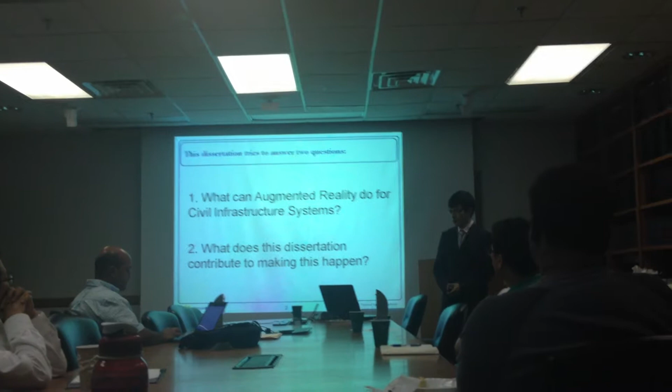Well, I don't want to be that serious. Actually, I just want to address two questions. The first one is, what can augmented reality do for civil infrastructure systems? And as John Kennedy says, ask not what augmented reality can do for you, but ask what you can do for augmented reality. So that's the second question I want to address: what can we do to explore the potential of augmented reality?

Since we have a lot of guests who might not be very familiar with augmented reality, let's start with what is augmented reality. If you search online, there's a classic definition with three items: first, the alignment of virtual and real objects; second, the coexistence of virtual and real objects; and third, virtual and real interacting in real-time frame rates.

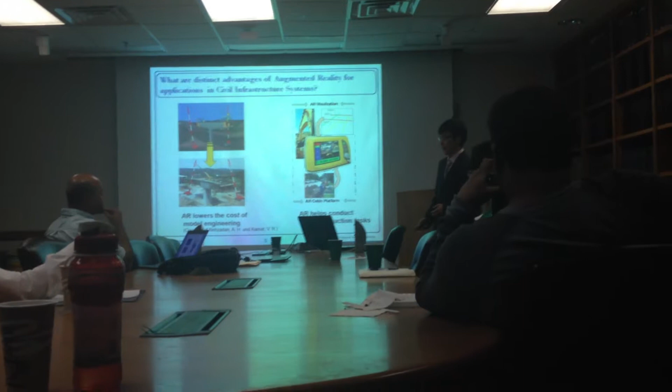Or, because of the coexistence of real and virtual, we can begin to conduct field tasks with augmented reality. To be more specific, researchers have identified eight specific areas where augmented reality could be useful, like excavation, coordination, inspection, etc. Let's take a look at a few examples.

First, excavation. It's about visualization of underground pipelines so that operators can see them to avoid collisions.

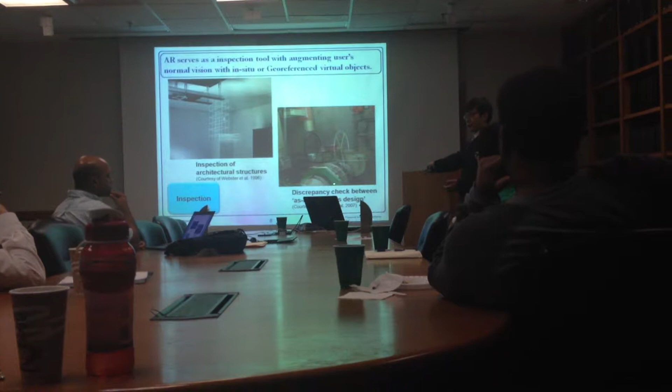Inspections: you have a design model and an as-built model. You want to compare the discrepancy between the two to find out what you need to do about it. And supervision is about superimposing the schedule on top of your job site so you can find out whether you're lagging behind or on track.

Strategizing is about a plan for the future. You want to do some simulation to see whether that works, to find out the economic and efficient way to do that. Those are some examples of augmented reality in civil infrastructure systems, and that's a brief answer to the first question we talked about. Now let's get to the juicy part: what can we do to make those things happen?

Before we get into these varieties of applications, there are always some technical issues you have to confront. The first thing is called registration, which is about alignment of the virtual and real objects. And occlusion, which means you have to create an illusion that the virtual and the real coexist together.

After we solve this problem, we can begin to get into a lot of varieties of applications. Because all these applications involve these technical challenges, that's why we came up with the idea of integrating these solutions into an open and scalable framework, so that third parties can just focus on their domain-specific questions and not worry too much about the underlying registration and occlusion problems.

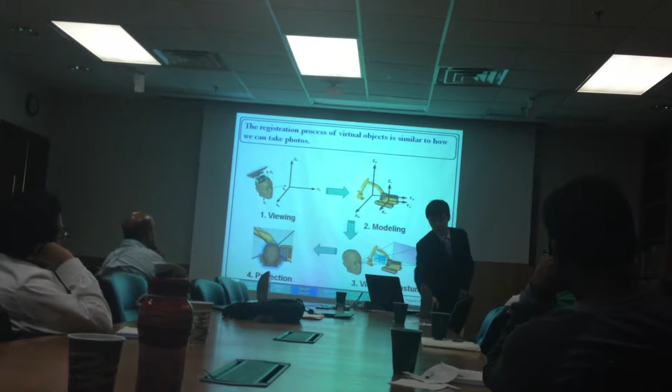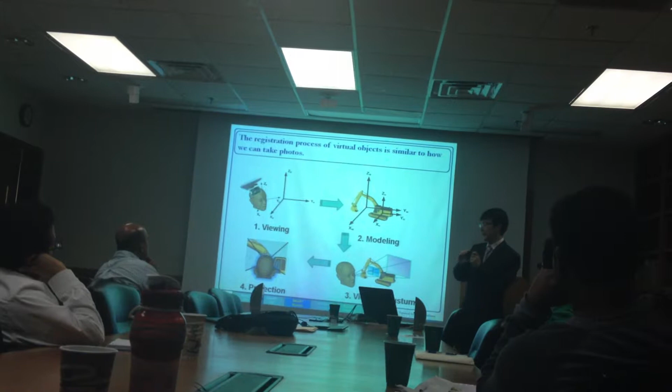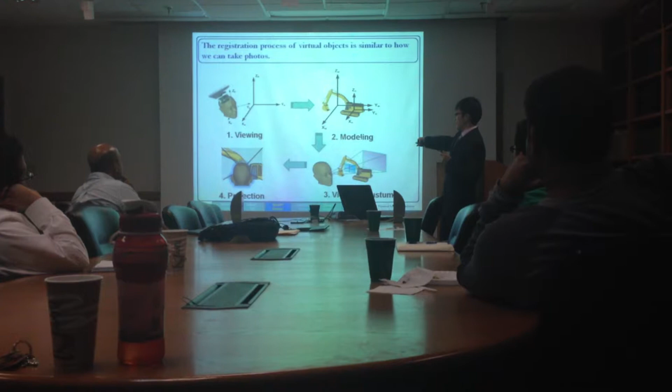When you begin to take pictures, you ask someone to be somewhere and make a pose. Then you position your camera and rotate it or whatever, then you adjust the lens of your camera, and boom, you take the picture. That's exactly the 4 steps: you position your camera, you ask the virtual or real objects to stand in a certain location, you adjust your lens, and you take the picture.

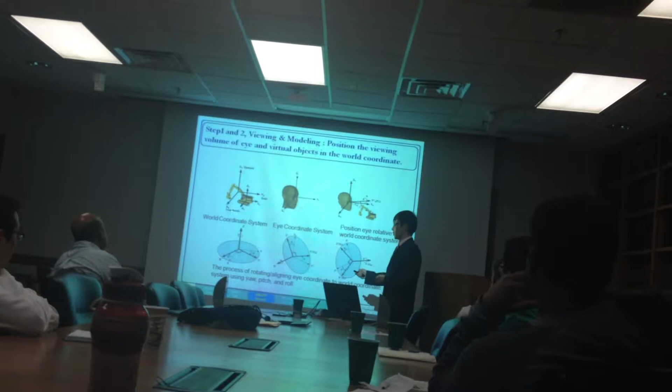It's not that simple in augmented reality because there is virtual and real. For the real part, we have the RGB camera. But for the virtual part, we need the virtual camera to be aligned with the real camera so that the virtual objects can be aligned with the real objects. That's why you need to track the location and orientation of the real camera and adjust the parameters of the virtual camera accordingly.

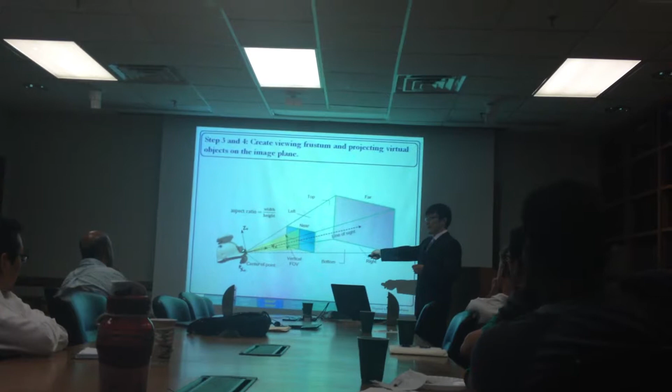The real camera has its own field of view and its own principal point. So you want to make sure you calibrate your real camera and put those parameters into your virtual camera.

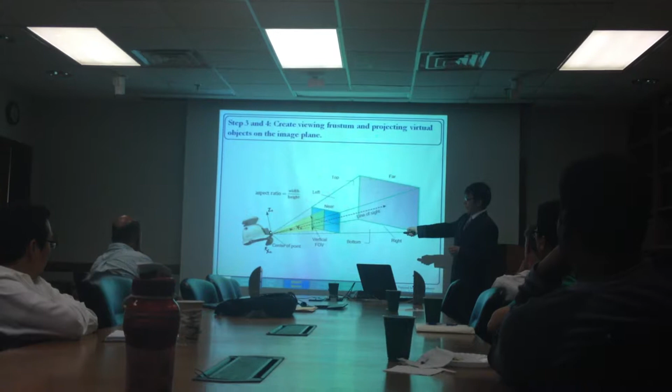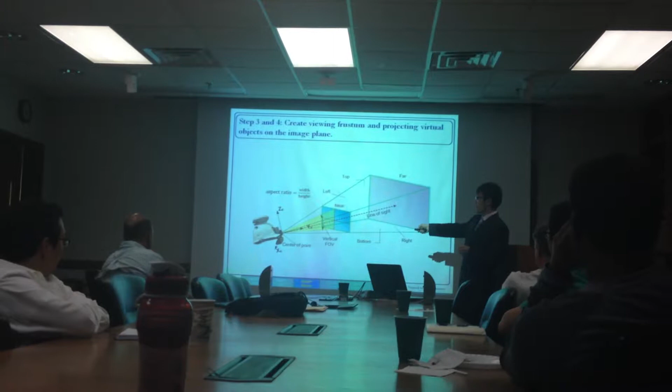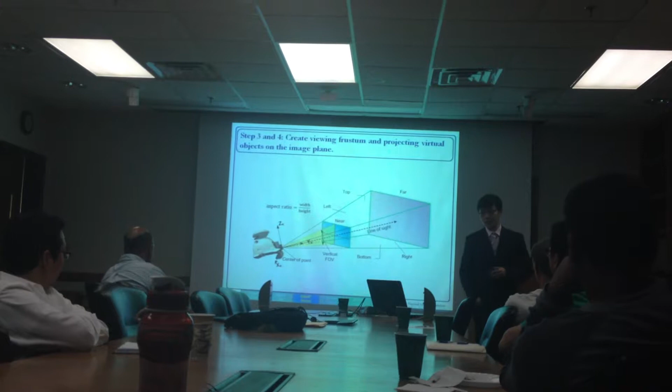So that's the job about smart motion. It's about aligning virtual with the real objects, and it uses information of location and orientation of the real camera.

I said I can get the location information from the GPS. That's actually the job of something called smart sensor. And smart sensor uses AR location and AR orientation as a common interface to smart motion. But since I said I get that from GPS, why don't I just call it AR GPS?

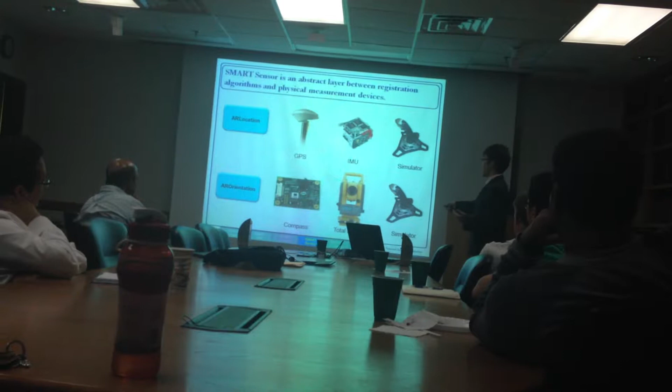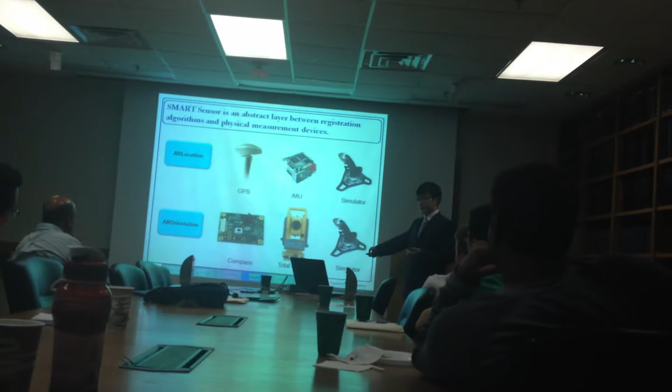Because you can not only get your location from a GPS, but you can also get that from, for example, an IMU, an inertial measurement unit. Or you can just simulate that, give them an arbitrary number. And that's the same thing for orientation. You can measure that by the compass, or you can do that with a total station, or just simulate that. That's how smart sensor acts as the abstract layer between the smart motion and the physical device.

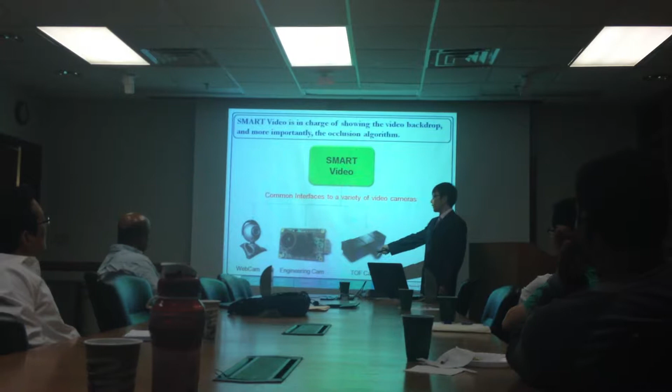Because the problem is, you can not only get your real background from a web camera, you can also get that from an engineering camera, or even something called a time-of-flight camera. This camera doesn't give you an RGB value, it actually gives you a depth map of the whole environment. Or even more, you can get a hybrid camera with an RGB camera on top and a depth camera on the bottom. So the same principle applies here.

Smart video provides a common interface to these different kinds of camera so that it looks transparent to whatever sits on top of that, just like what we talked about with smart sensor. But if it just provides a common interface, then I can simply integrate that to the smart sensor. The reason I separate that is that smart video is going to handle some other important work called occlusion.

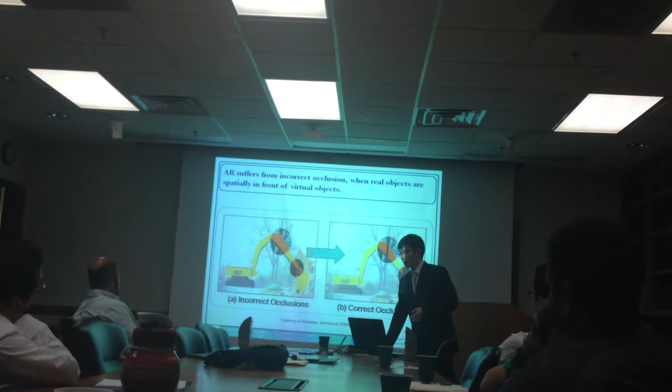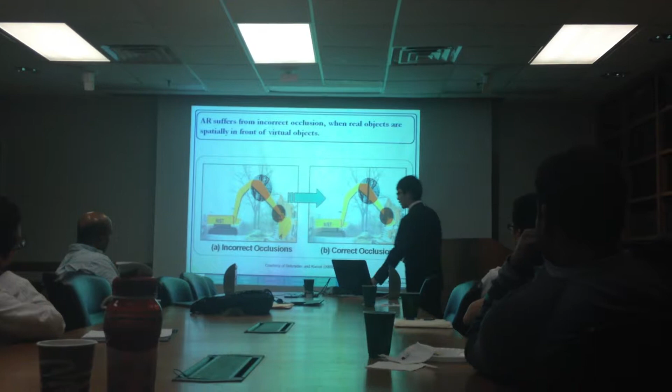We have been talking about the alignment between the virtual and the real objects. But don't forget, there's a second definition called the illusion that real and virtual objects coexist. And one of the illusions is that you need to correctly solve the spatial cue between the virtual and real.

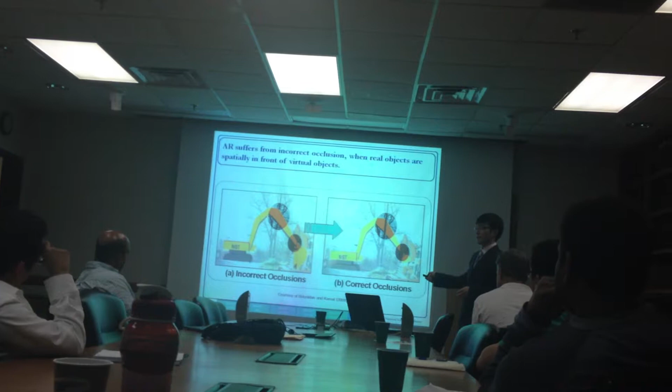For example, traditionally, if I'm using an RGB camera, when you project the real thing onto that camera, the distance information is lost. So there's no way but to put the real images as a background and always superimpose the virtual objects on top. But it's not always this case because, for example, this balloon can be behind the tree instead of in front. This shows a correct occlusion effect, while this is not. So that's why we need to solve this occlusion issue.

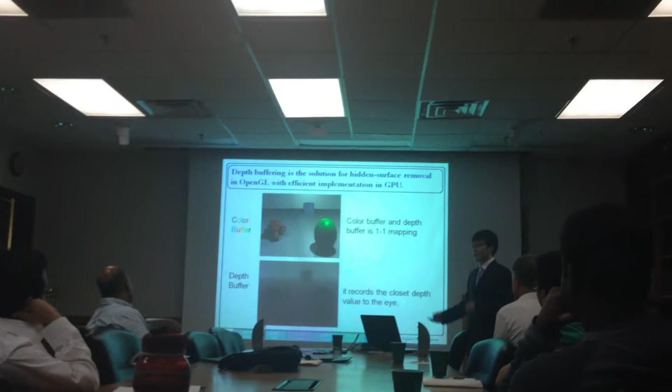How? Well, there's an old saying in China that says, if you don't know how to live your life, simply look at your neighbors. Here, we are looking at OpenGL. OpenGL is a graphics library where it helps you to create 2D or 3D images, geometries, and so on. And for OpenGL to solve the occlusion issue, it maintains two buffers, a color buffer and a depth buffer.

A color buffer is what you see on your screen, right? With RGB values, so you know the shape, the attribute of the geometry. Depth buffer is not something you can see, but it's very important. It helps you make depth comparison and decides which part you can see, which part you cannot.

Let's make a comparison. For example, I want to render a picture frame on the back of the conference room in OpenGL, meaning it's virtual, and its color, say, is blue, and it's 7 meters away from me. So when I render that frame, I put the blue pixel into the color buffer and put a 7 meters distance in the depth buffer.

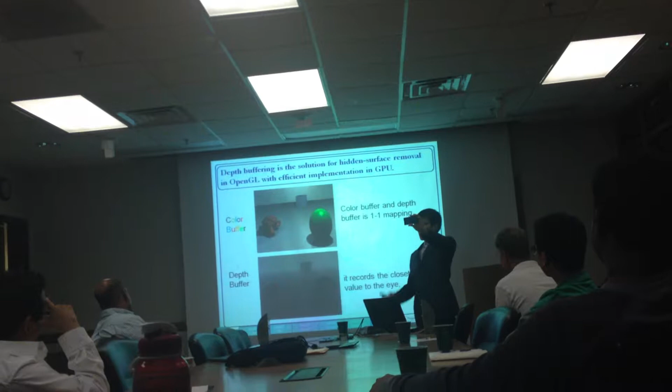Then, suppose I have a camera right in front of me that occludes that blue frame. When I render that, suppose this is 1 meter away from me, I'm going to put black, put the 1 meter in the depth buffer, compare that with the 7 meters. Since 1 meter is smaller, it's going to replace the previous value in the depth buffer, and then put a black pixel in the color buffer. That's the way you solve an occlusion issue in the OpenGL environment.

So, from the experience of OpenGL, if we have the same information about the real background, like a depth image, we can simply write that into the depth buffer. Later on, when we begin to render the virtual objects, we can make a comparison between the depth information and decide who gets occluded and who gets shown.

To get that information, we have a magic camera called time-of-flight camera, as I mentioned. It sends out modulated infrared light, and depending on the speed of light and its reflection time, it can calculate how far away the real objects are from the viewer. Fortunately, it also can capture the intensity message at the same time, but it's black and white. So we can upload this information into OpenGL and solve the occlusion issue.

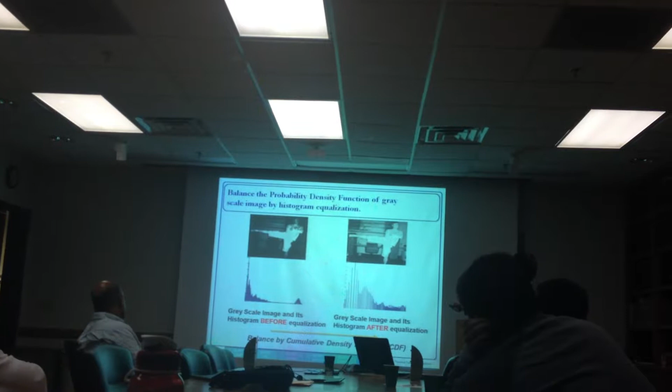But before we do that, it's not free, because the intensity image you get is very biased, so you want to rescale it to make sure it looks a little better. Another thing is about the depth value, because OpenGL does not accept any values beyond 1.

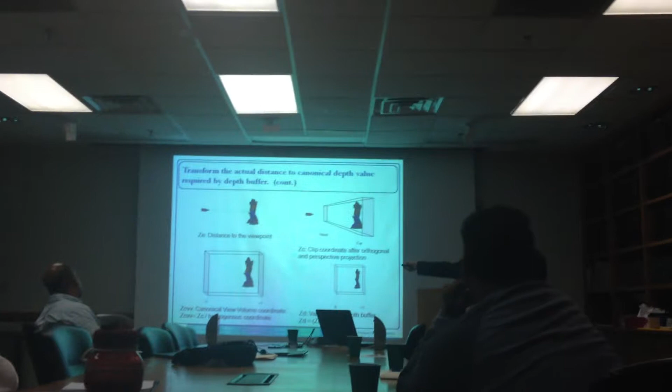Why? Because of the perspective division. Let's use some figures to illustrate that. Suppose this is Optimus Prime. It's, say, 7 meters away from you. That's the physical distance, 7 meters.

In OpenGL, it doesn't render everything. It only renders something that's between the distance of near and far, which you decide. Anything beyond that gets clipped.

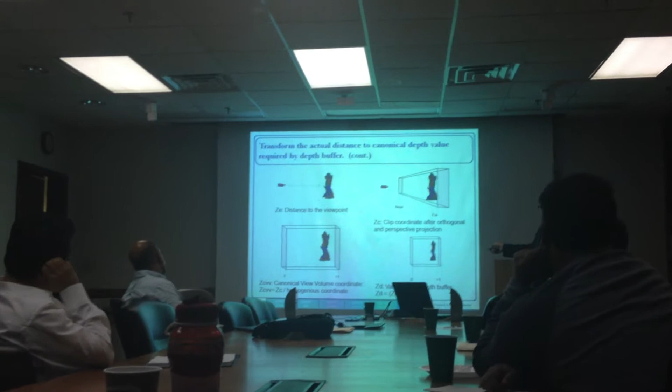Then go to the left bottom corner. It tries to scale this frustum into a canonical view volume so that the depth value becomes a range from -1 to +1, and then eventually further scales it so that the depth value is between 0 and +1.

So when you are in OpenGL, do as OpenGL does. Make sure you transform the distance in the same way as OpenGL so that it can make correct comparisons between the real objects and the virtual objects.

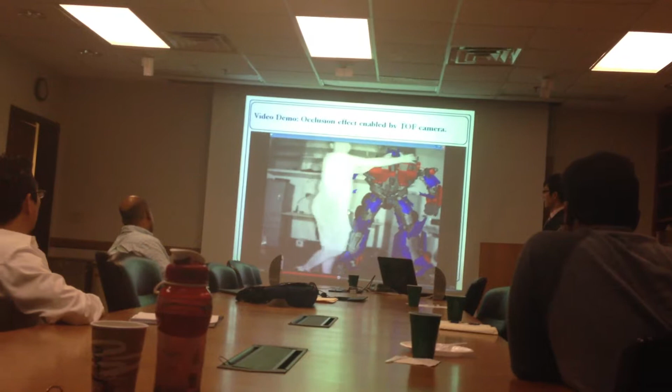This guy's first time playing with it. Seemed that he had a lot of fun with that.

Well, if we were in the 1950s, I'd be happy with black and white. But come on, we're in the 21st century, we're even beginning to enjoy 3D movies. I'm not that ambitious, but at least I want to show you the RGB value.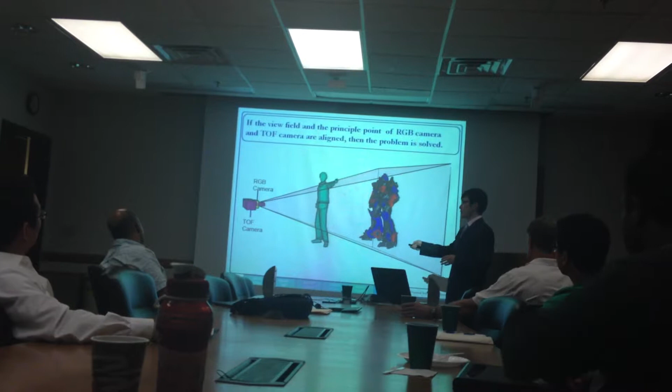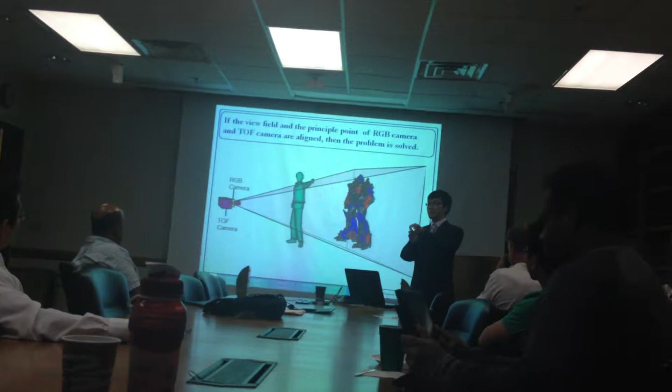If you remember, I talked a lot about how to align the virtual camera with the real camera, to make sure virtual and real objects are aligned. We have the same problem here with the RGB camera and TOF camera, but with more difficult questions. Why? With virtual and real, you can force the virtual camera to share the same projection parameters as the real camera. But here you get two physical cameras, you cannot simply smash them together into one line of view.

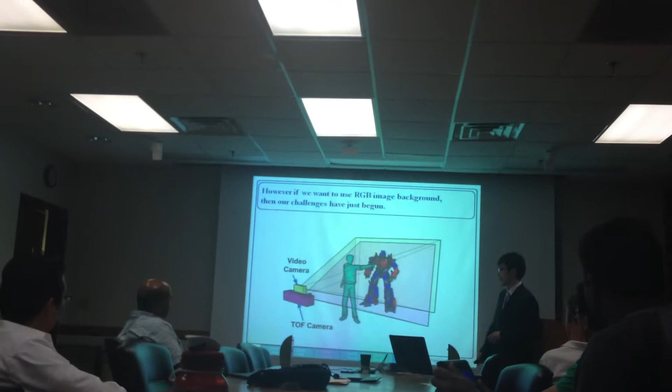Usually you get this kind of hybrid camera with a video camera, RGB camera sitting on top, and a depth camera, TOF camera, sitting at the bottom. Then the problem comes: it doesn't share the same location, same orientation, and even worse, it doesn't have the same field of view, principal points, etc. So since we cannot smash them physically, we have to do some kind of image registration to make sure they are aligned in image space.

The first method that comes to mind is called homography. What is homography? It's actually simple. You have two cameras, you take a picture from two perspectives, and on those two images you find some similar or correspondent points. You believe the transformation from one point to the other can be described by a linear transformation. If you have enough points, enough correspondences, you can solve for that transformation. Then when you have new points, you simply plug them into the linear transformation and get their location on the other image.

But this homography has the premise that these two cameras have to share the same location. Or if they don't share the same location, they need to look at something very, very far away from the camera -- that's the premise. Here, because we think the RGB camera and the TOF camera's principal points, or locations, are very close to each other, we make this approximation and use homography in the registration process.

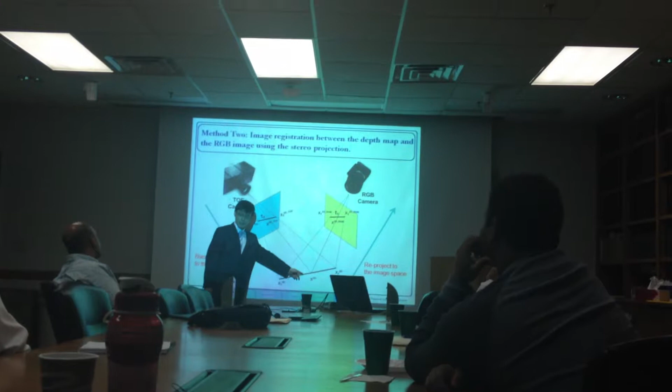Let's see, there's a point over here in the 3D space, in the real world. It gets projected onto the TOF image space, called T2, and it also gets projected onto the RGB image, T1. If we can back-project T2 to the point X in 3D space and reproject it onto the RGB camera, we can build the correspondence. This is impossible with two normal cameras because, as I mentioned, when you use an RGB camera to take pictures, that distance information is lost.

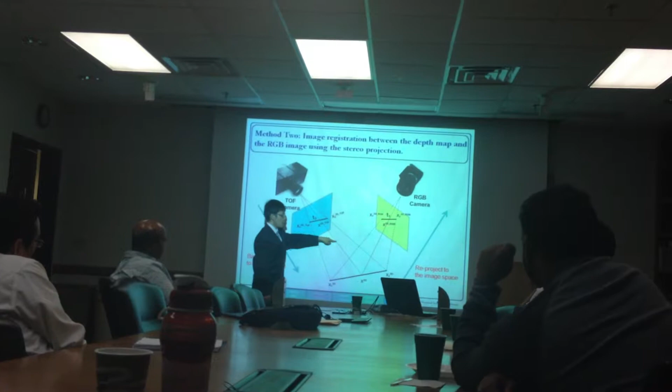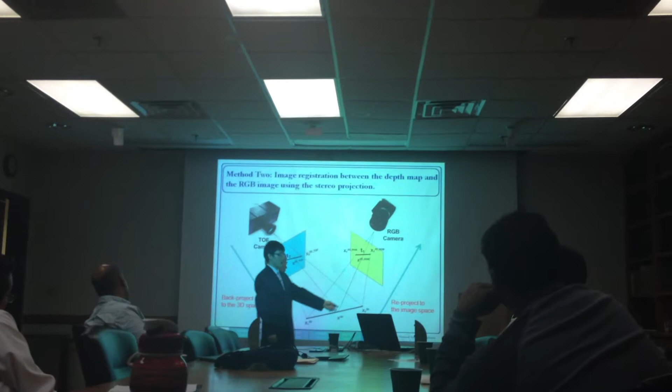When you try to back-project, even though you know this point should be somewhere on this line, you don't know exactly where it is. But with the TOF camera, you know the distance, so you know where it is on this line. Then you have the intrinsic projection matrix of the RGB camera so that you can reproject onto the RGB camera image plane. And boom, the correspondence is built.

Of course, now we can build a correspondence, but it's not enough. There is a quite big difference between building a correspondence quickly and building a correspondence very slowly. And this is a very miserable case where you build it very slowly.

So what is the frame rate here? Like 3, 4? 1, 2, because that correspondence is all being computed on the CPU, so it's extremely slow. But if we have some other technique...

Here's another example in the outdoor environment. It's actually very simple for you to figure out that a person is standing on a virtual lift scissor - if you can see the magic over there. You can see this is an incorrect occlusion, so the lift scissor is always on top, which just looks like floating on top of the scene. She's sitting there for a purpose. Let's see.

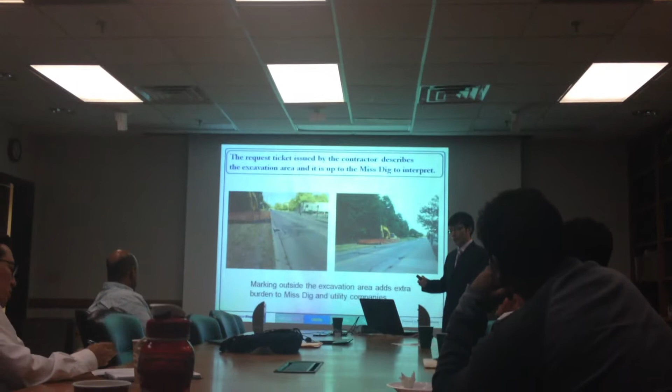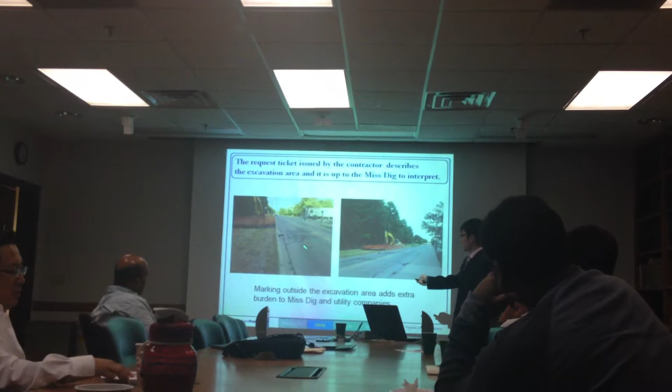So the first thing Bob is going to do is call the one call center, or Miss Dig. Miss Dig sends out utility companies to mark the ground to show where utilities lie. But usually Bob would describe it simply as, I want to dig on Hayward Street. So the utility surveyor will come and mark the whole street.

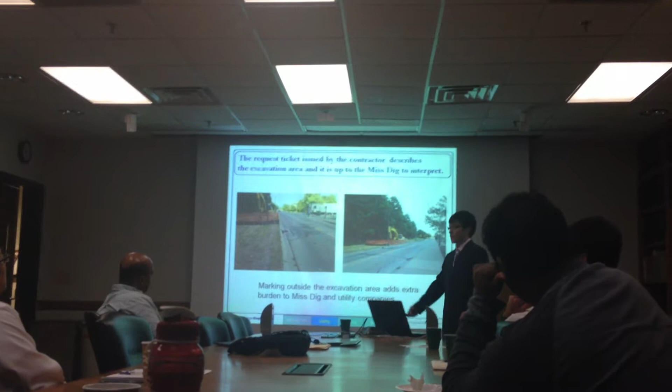But sometimes Bob is kind and says, I want to excavate in front of G.G. Brown, and that makes the utility surveyor's life easier. Or he can be very precise, saying, I want to dig right in front of G.G. Brown, in front of the construction's front door, on the grass. But usually that's not the case.

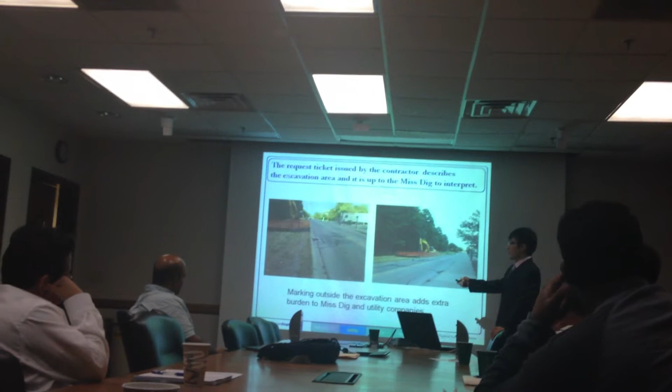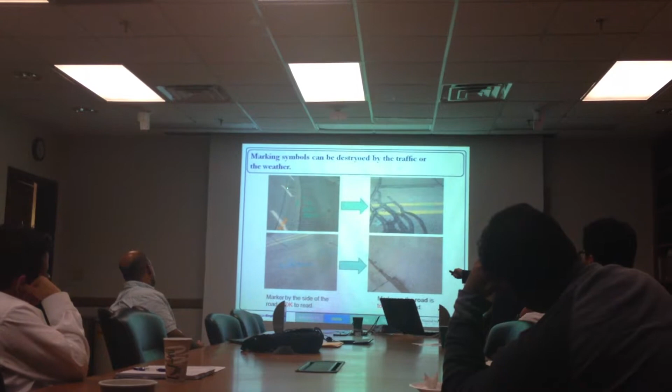So the utility surveyors usually mark double, triple, multiple times the real excavation zone - that's extra workload. Another problem is, after they mark on the ground, these markings can be very quickly washed off or destroyed by traffic or weather.

This is right outside G.G. Brown, showing the excavation activity happening outside. I'm taking these pictures while the excavation activity is going on. This is by the sidewalk - you can see the markings are still okay, but those probably marked at the same time in the middle of the road are very difficult to interpret.

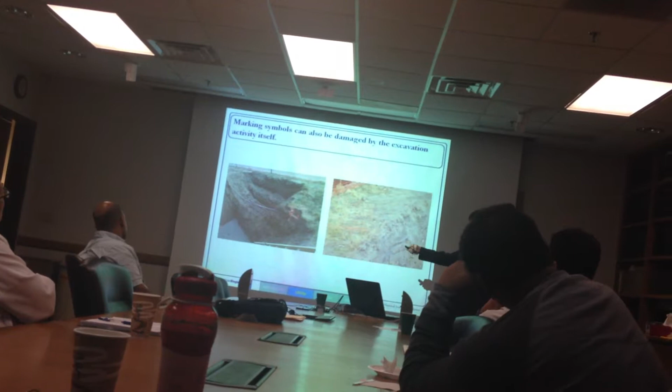And even worse, when you begin to dig, after you dig out the layer of soil or cement, you destroy those markings. So it's totally up to the operator to interpret where the utility line is. And if they just come back from lunch, which is a typical case, they probably just forget where the marking is.

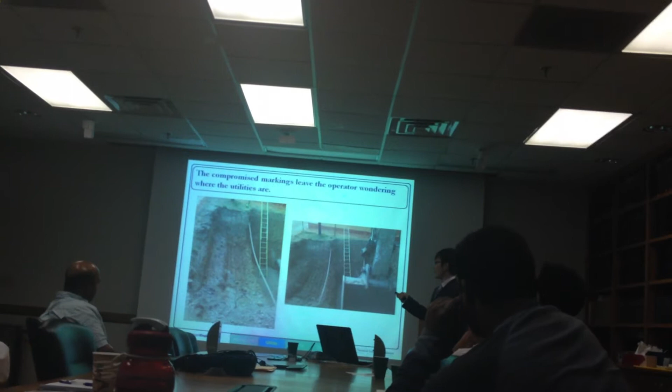You can see how close the excavator teeth are to the electricity power line. You can get a better idea from here - this is the teeth of the bucket. See how close it is.

So that's why we want to solve this problem. First of all, when Bob sends a request ticket to Miss Dig, he simply walks around the planned excavation zone, and then when the surveyor comes, they can see where they need to work, and digitally mark it on the ground. When the operator comes back from lunch, they can just see where the digital pipeline is, so they will never miss where it is.

And here I want to show you a conceptual video of the life cycle I just talked about, but it's not in augmented reality - it's a concept video in a Google Earth environment.

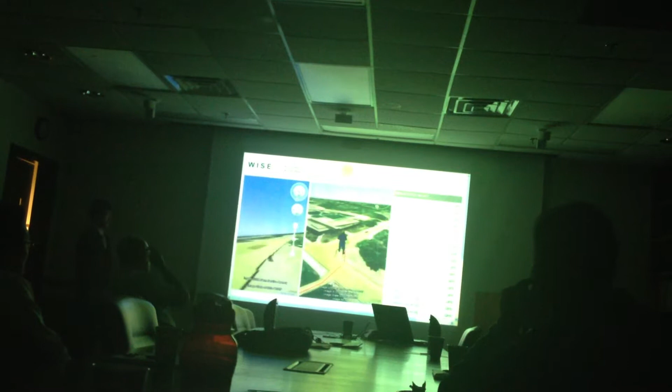And of course, they can mark digitally on the ground. And then the operator can see through the ground to find where the utility line is.

And here is my initial effort to visualize some pipelines provided by DTE Energy, and I superimpose it on top of the ground. I won't go into the technical detail here, it's too much.

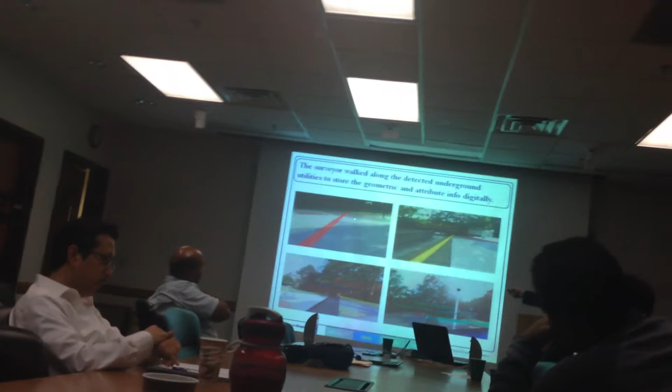And here is my latest effort to overlay the digital layer on top of the ground so utility surveyors can see where they need to mark. And then they just walk along the lines, tap it, and mark the on-the-ground utilities digitally. Here, I guess you cannot see the color.

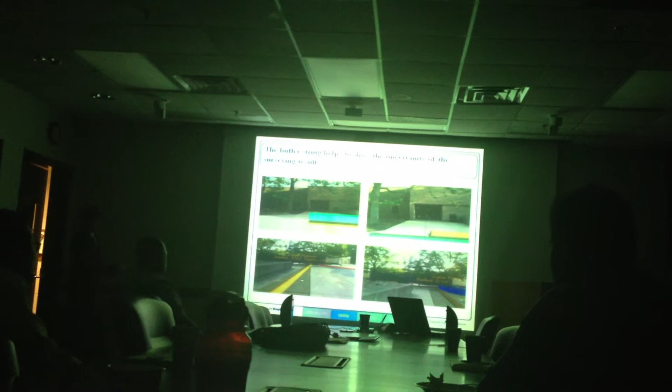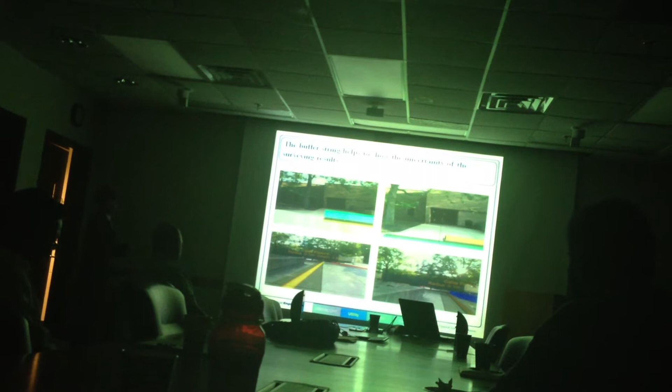And here, if you're familiar with MISS DIG, when it marks something on the ground, it doesn't mean the pipeline is located exactly on that same location - you always have some buffer zone. So you want to make sure you have a buffer zone there, and when you're getting too close, instead of using excavator mechanics, you have to use a shovel or your hand.

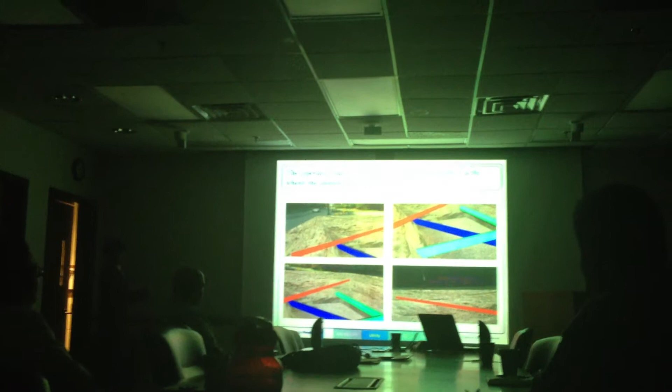And here, when the operator comes, they can see through the ground and have a better idea about not only where the utility is, but how deep it is. And here's some other views.

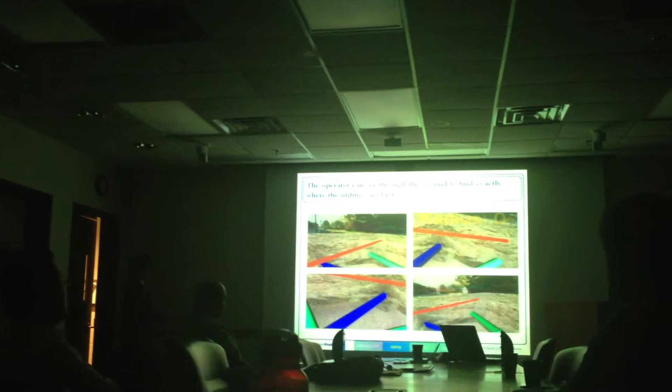That concludes the application about utility visualization. Next, we're going to go from outdoor to indoor. We're going to try to visualize the simulated process on a tabletop environment, and we call it ARVita.

I think half of you know what VITASCOPE is, but I don't expect so many guests today, so let me spend a minute explaining. VITASCOPE is the PhD work of Professor Kamat, and it tries to visualize the simulated construction process to validate and give the owner a better sense of what's going on in the simulation. More importantly, it's very loosely coupled and provides an open API so you can build applications on top of VITASCOPE.

Because we're going indoor on the tabletop, GPS no longer works in the indoor environment since it's invisible to the GPS signal. So instead we have to use vision tracking. SMART now, instead of using location and orientation, began to use vision tracking techniques.

Why do we want to build a tabletop augmented reality? The basic idea is that contractors have stacks of plans and drawings to discuss. The good thing is it's very easy for them to collaborate on paper drawings - they can strategize or plan, pointing to certain points on the paper. But the downside is there are so many of them, it's very difficult to archive and maintain.

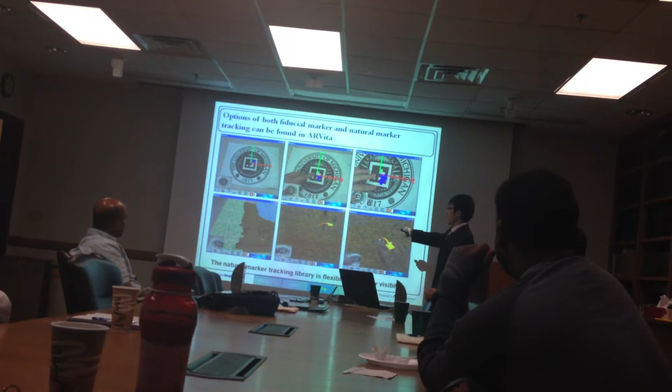When talking about vision tracking, there's a variety of methods. What we just saw here is called fiducial marker tracking, and there's another called natural marker tracking. I won't go into details, but basically for fiducial marker tracking, you need the camera to cover the whole marker, while with a natural marker you can partially occlude it. For example, even as my finger partially occludes it, it still shows the virtual content.

This is actually a natural marker developed by my colleagues, called KEG. I'm not playing with that word, but I want to say that this ARVita is capable of adapting itself to multiple tracking methods. Let me show the video quickly.

This is a fiducial marker - you can see this is my desktop. You can rotate the marker to interact with the scene, or you can just use your mouse to drag the scene.

Here we show some excavation activities with an excavator and a bunch of trucks. But you need to make sure you cover the whole marker for fiducial marker tracking. With a natural marker, which is KEG in this case, you can safely cover part of the marker without losing the virtual scene.

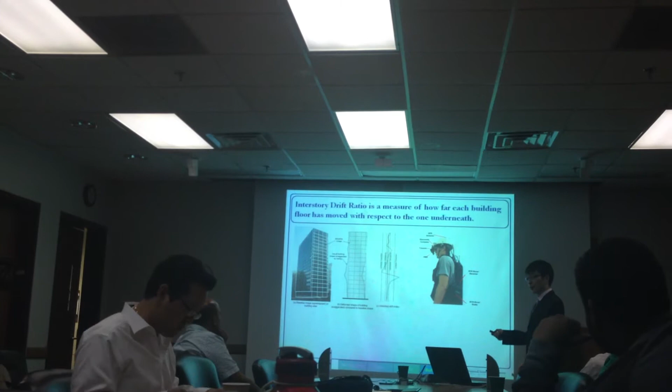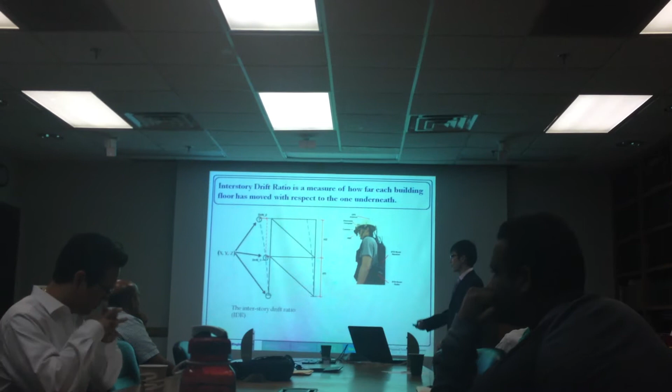Let's talk about why we want to do that. I guess there are a lot of earthquake engineers here, so please correct me if I'm wrong. After an earthquake, some buildings collapse, some remain standing. For those remaining standing buildings, you want to assess the soundness of the building before you reoccupy it. One important index to estimate is the inter-story drift ratio, which is the subtraction between the ceiling and the floor, divided by the height of the story.

And then with that inter-story drift ratio, you can use that for building collapse simulation. I think a lot of people are nodding their heads. You seem very familiar.

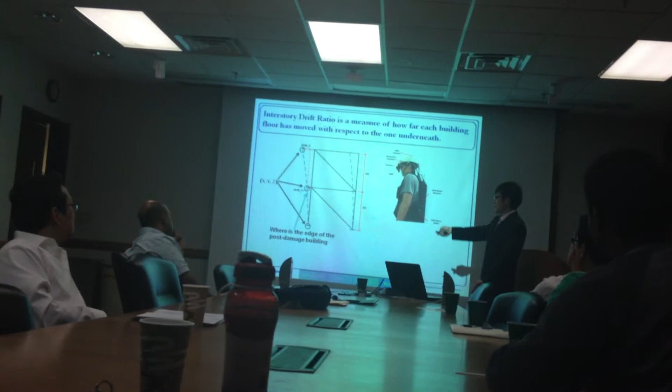Simulation is not our job. Our job is to calculate the story drift ratio. But we have a lot of challenges. For you to do the subtraction, you need to know where the corner is. For you to find the corner, you need to know where the edge is. So the first problem is, where is the edge of the building? Secondly, after you find the edge, you still need to find where the corner is. So there are 2 problems here.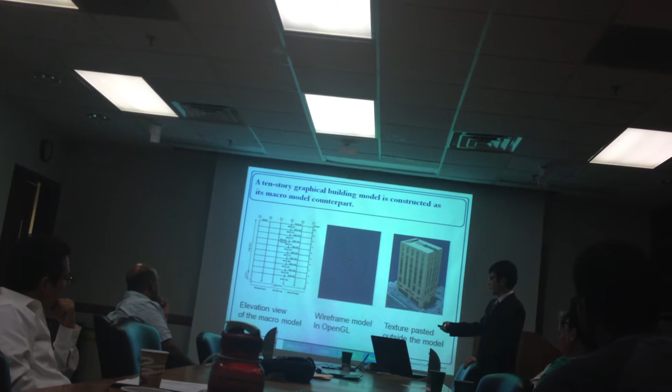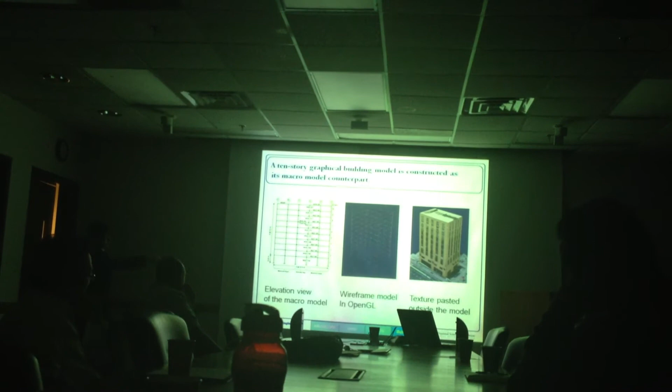And I create a counterpart. You probably cannot see clearly. I create a counterpart of that in a virtual environment, which is a wireframe model. And then I paste images right outside to make it look real. And the reason I want to do that is you have the wireframe model, you paste the texture, and then

I begin to shift, because you want to create a damaged building, right? You begin to shift the vertex of the building. And when you shift it, the facade of the building is also going to drift accordingly, so that it can begin your edge detection of the damaged building.

As I mentioned, there are 3 steps. First, position your camera. That's exactly the same principle I just mentioned in smart motion, where you want to align your virtual camera with a real camera. So the same principle applies here.

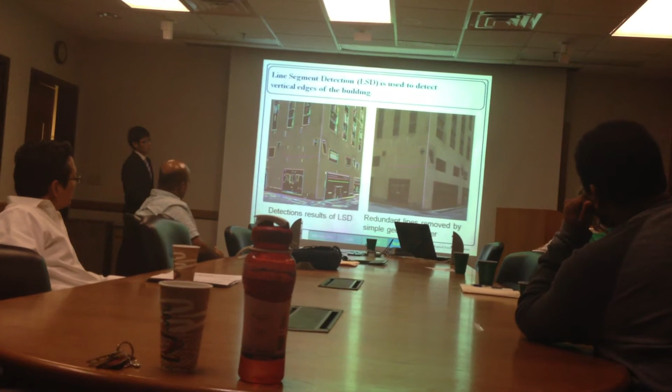Okay, now we want to detect the edge of the building. That's actually a good existing solution, something called line segment detector. It's very good and robust at detecting line segments. Don't be scared by all the redundant lines over here, because we know approximately where the edges are. So we can easily filter out all this redundant information and get a clear edge of the building.

Now, you get the edge of the building. You want to estimate where the corner is. For you to get the 3D location of a corner, there is a very straightforward way: you take a picture from one side, you find where it is on the 2D image. And then you take a picture from another side, you find the same point on that image. And then you do the triangulation. That's how you calculate 3D points.

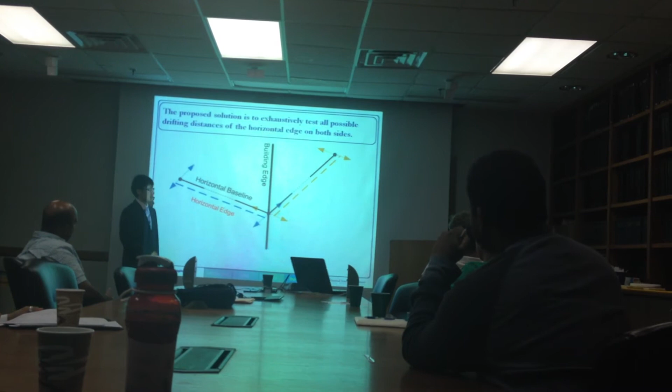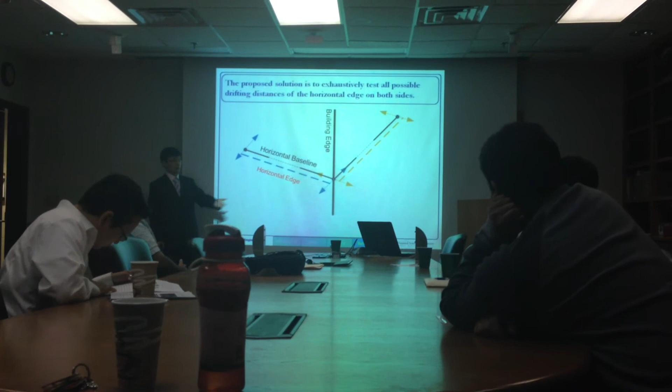So first, you need to find the 2D intersections on one image. And we have already detected the building's vertical edge, right? And the problem is, where is the horizontal building edge? Well, you can say with the line segment detector, if we can detect the vertical edge, we can probably detect the horizontal as well, like the outline of windows and doors. I mean, sometimes it's true, sometimes not. You cannot always assume the outline of the window is the outline of the building edge. So we want to make it more comprehensive, that's why we want to estimate it in an exhaustive way.

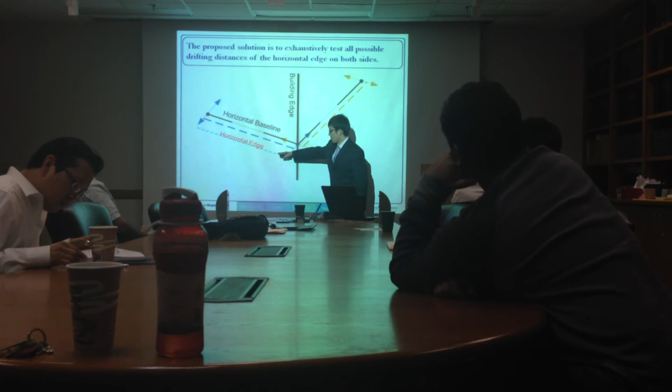Something we know is where the horizontal edge is before the damage, we call it the horizontal baseline. And then we shift it, if you see the blue dashed line over here. For every distance it moves, we try to estimate, here is the distance it has moved, x, and for every distance it moves, we can calculate its real location based on the triangulation I just taught. So ideally, if you make a good estimation, then what you have shifted, x, should match what you have calculated, x prime. And if these get very close to each other, then they will be a good candidate for my final solution.

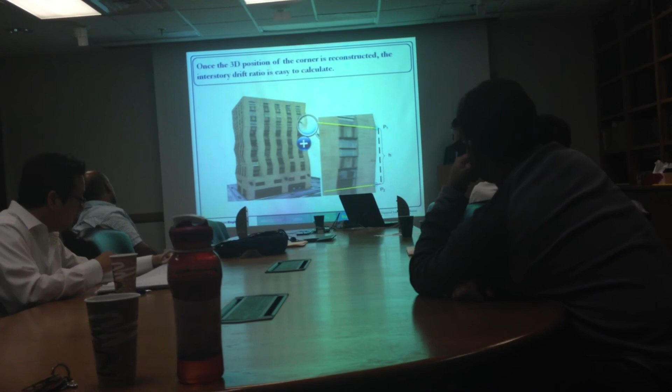Once you get the 3D coordinates of the corner, it's very straightforward to calculate the inter-story drift ratio. You simply do the subtraction divided by the height of the building.

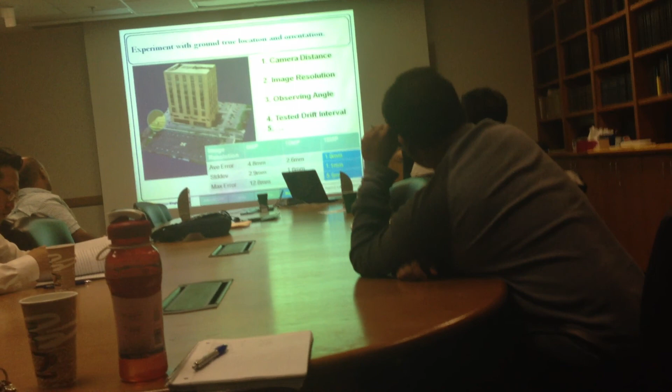And here, we first do that in a virtual prototyping environment. Virtual prototyping, the advantage of that is it allows you to test a lot of ambient parameters, like the distance between the camera and the building, image resolution.